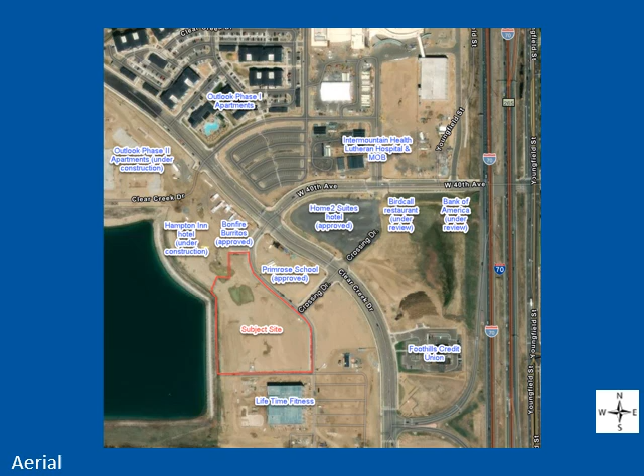The site to the southeast is the last remaining vacant lot on the west side of Clear Creek Drive within Clear Creek Crossing. The internal roadway system and utility infrastructure bordering the site on the east side were completed in late 2022, with some anticipated improvements to Crossing Drive slated to be constructed concurrently with the Lookout site. A trail bordering the west side of the site is currently under construction.

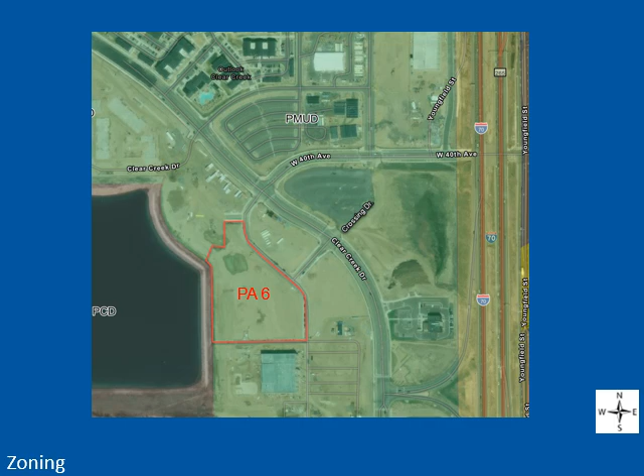The subject site is located within the Clear Creek Crossing planned mixed-use development shown in green, within Planning Area 6, also called the Harvest District, denoting this area as a commercial subdistrict in the development. The site is surrounded by Clear Creek Crossing development on all sides, with the exception of the Coors Pond to the west, which is under a separate planned commercial development zoning.

The request for SDP approval is the second step in a two-part approval process pertaining to plan developments. The first step occurred in 2018 when Planning Commission and City Council approved the Clear Creek Crossing Planned Mixed-Use Outline Development Plan, which established the zoning. The zone change also included approval of a vision book that establishes the intended design and architectural themes and materials, as well as a design pattern book that includes the more substantive development regulations.

Planning Commission recently reviewed an ODP amendment that altered the uses and development standards for Clear Creek Crossing zoning and design pattern book, and allowed the primary restaurant and entertainment district of Clear Creek Crossing to be relocated to the furthest west side of the development, to ultimately facilitate the development of the subject SDP.

The applicant is requesting to build 3 restaurant buildings totaling approximately 30,000 square feet, bordering a 0.67 acre park and plaza. Retail, restaurant, and entertainment uses are permitted in Planning Area 6, or the Harvest District, of Clear Creek Crossing, which includes the subject site.

I'll walk through proposed conditions in more detail on the next few slides, but the site also takes into consideration adequate vehicular access, planning area connectivity, and pedestrian and bike connections.

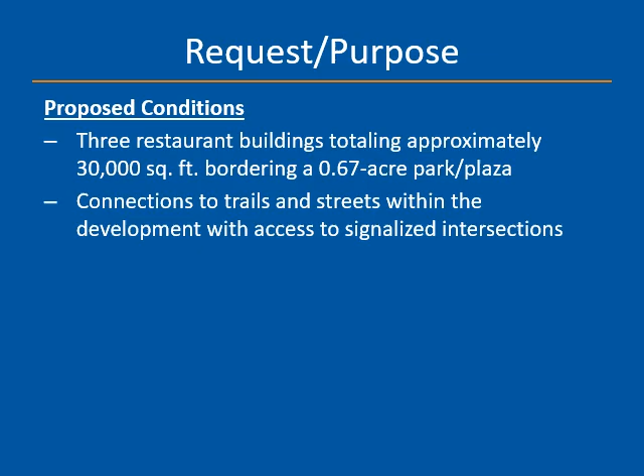The primary vehicular access point is proposed into the site via a roundabout extending from Crossing Drive to the east, which is planned to be constructed concurrently with the Lookout site and will connect users from West 40th Avenue to the subject site and feed into surrounding signalized intersections.

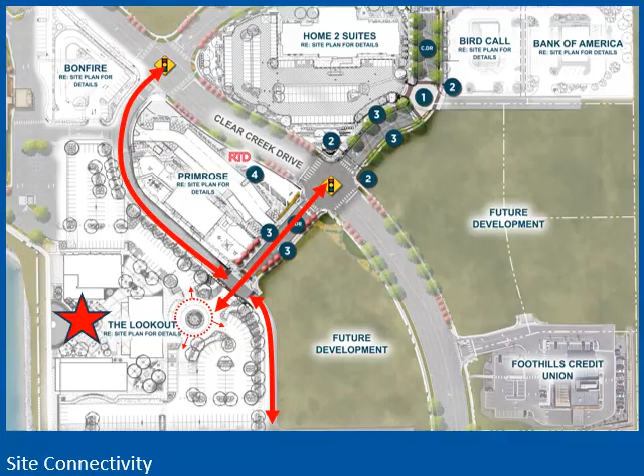The SDP reflects 226 proposed shared parking spaces. The parking is situated north, east, and south of the buildings and is broken into smaller lots to avoid large spans of parking areas, and parking is screened from surrounding streets by landscaping.

The design pattern book establishes setback and building orientation requirements specific to each development district within Clear Creek Crossing. For Planning Area 6 within the Harvest District, and because of the Denver water easement which traverses the site along Clear Creek Drive, there are no build-to requirements. Instead, the buildings must be oriented proximate to the primary pedestrian routes.

The buildings and plaza space are primarily oriented to the internal plaza and west side trail. The proposed building orientation will result in an enhanced pedestrian experience along the trail to the west and Crossing Drive to the east, and will allow for easy pedestrian and bicycle access to the trail as well as to the internal roadway network, surrounding signalized intersections, and adjacent commercial uses.

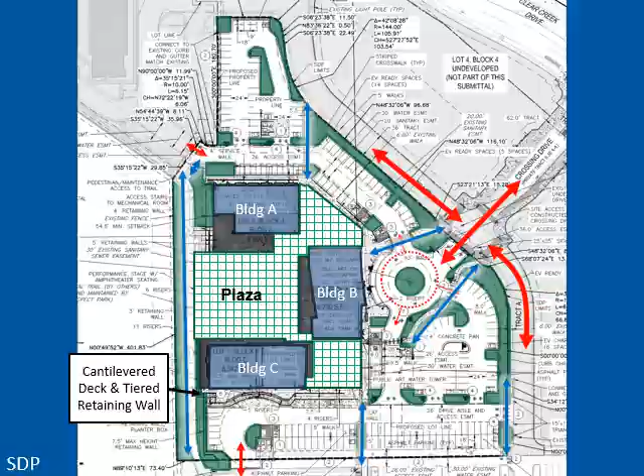A cantilever deck and tiered retaining wall are shown hugging Building C on the south end to help with grades. I'll get into grading in just a moment, but first, let's talk about the plaza.

It is 21% landscaped and offers entertainment and amenities including an amphitheater, bike station, picnic tables, benches, playground, artificial turf, gaming areas for cornhole and the like, and fire pits. The plaza incorporates overhead string lights and artistic elements such as a tractor slide and water tower public art feature that create a unique public space.

The plaza will be owned and maintained by the Metro District and will be publicly accessible. The applicant's intent is to acquire a common consumption liquor license to cover the restaurants and plaza. The plaza will take on a more urban feel and be primarily hardscaped with trees and tree grates. Landscaping is situated primarily in planting beds close to the buildings, entries, and trail to leave open plaza area for active recreation.

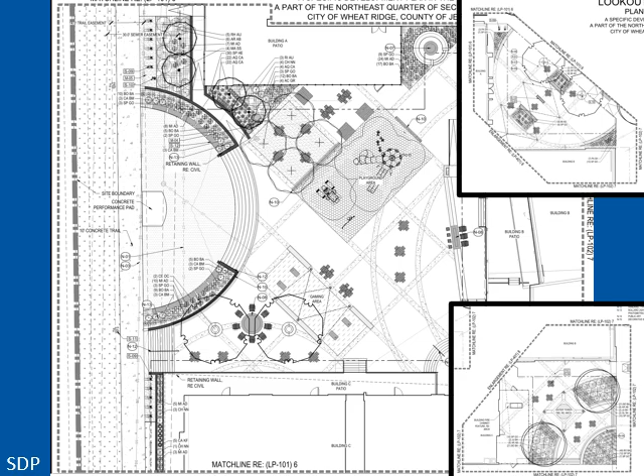Grades on the site present a unique challenge. There is about 12 feet of grade change across the site from north to south and about 14 feet of grade change from west to east. Building C, the southern building, and the associated southern parking area are approximately 14 feet above the trail.

The grades are highest at the south end and level out to the trail north of the Plaza Amphitheater, where an accessible entrance to the trail will be provided.

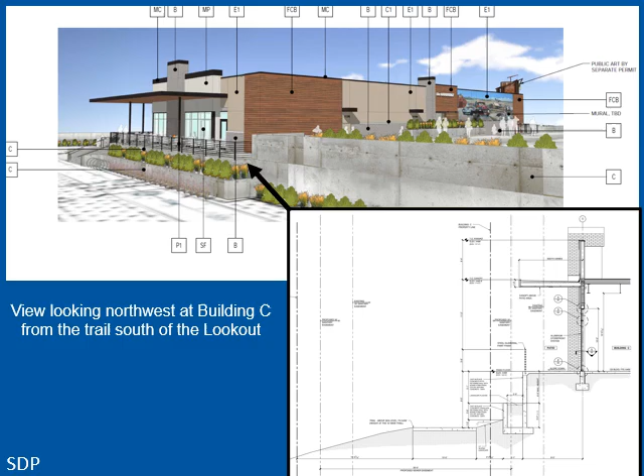The architectural style is driven by the Clear Creek Crossing Design Pattern Book and Vision Book, which call for a modern agrarian aesthetic that blends traditional agrarian forms and materials with a modern feel. It also requires strong attention to be paid to the pedestrian realm.

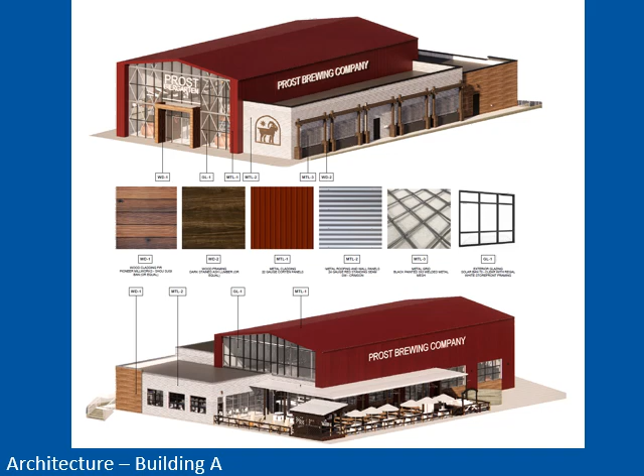The northern Building A, to be owned by Prost, is proposed to be single-story and approximately 28 feet tall. Architecture is comprised of primarily Corten metal, glass, and wood, and takes on a traditional barn aesthetic integrated with a modern glass storefront. The building features material variation to enhance the pedestrian realm and a pitched roof that strongly reflects the agrarian theme.

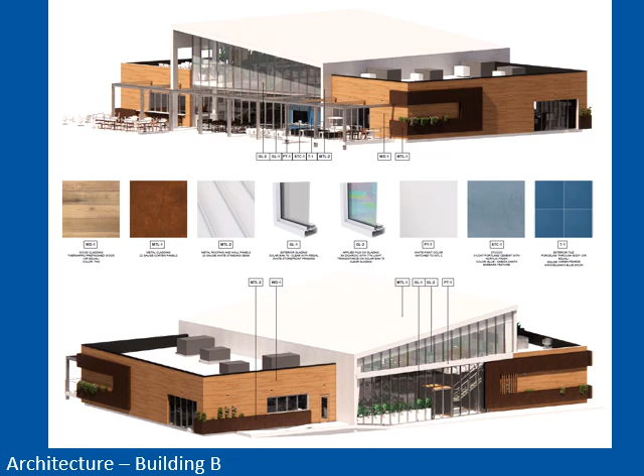All three buildings incorporate outdoor seating areas fronting the internal plaza, with wood, metal, and glass elements reflective of the modern agrarian theme. The building materials carry over to all 4 sides of the buildings, resulting in 4-sided architecture. Overall transparency is substantial and meets or exceeds requirements of the design pattern book for the facades facing the street and public spaces.

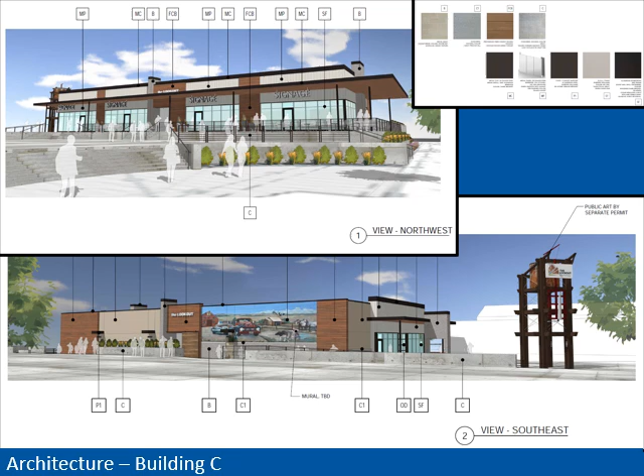Since Wheat Ridge is served by special districts, we sent the application on referral to outside agencies, including fire, water, and sanitation, as well as completed an internal review. We did not receive objections from outside agencies, and coordination with these districts is ongoing.

Civil construction document review is underway, and a plat is under review for the entire Block 4 area to create lots for each site, including the lookout users. A recommended condition of approval has been added to denote that minor changes may be required to the site plan to coordinate this development with surrounding infrastructure improvements being constructed by the master developer.

Before the hearing, the property was posted for 15 days and letters were sent to property owners and residents within a 1,000-foot radius, and the project was posted to Wheat Ridge Speaks. No comments have been received to date.

Staff finds that the SDP is consistent with the underlying zoning, is in compliance with all standards set forth in the ODP, Clear Creek Crossing Design Pattern Book, and City Code. The SDP is consistent with the purpose of a plan development, and all agencies can serve the property. Ultimately, staff is recommending approval with conditions as listed in the staff report. Thank you.